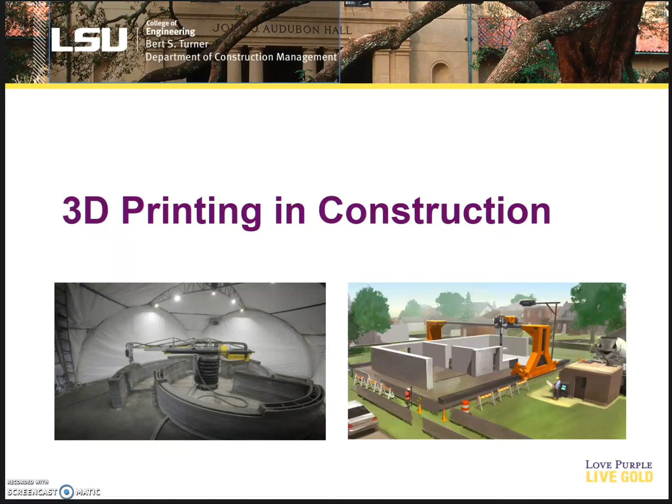3D printing as a technology has been around since the 1980s. It's found plenty of use within manufacturing, specifically for prototyping. And more recently, it's been finding uses in other industries such as medical, or in this case, construction. Contour Crafting Inc. is the first American company to adapt it to a construction scale. According to their estimates, 3D printing can reduce costs up to 80% of conventional building.

This is through shorter project lengths and more efficient uses of materials. Due to being an additive manufacturing process, there's less excess, and there will be virtually no labor costs whatsoever. This will also increase safety within the industry as a whole. The construction industry has an exceptionally high accident rate, so this would make litigation costs for any sort of thing like that just much more affordable.

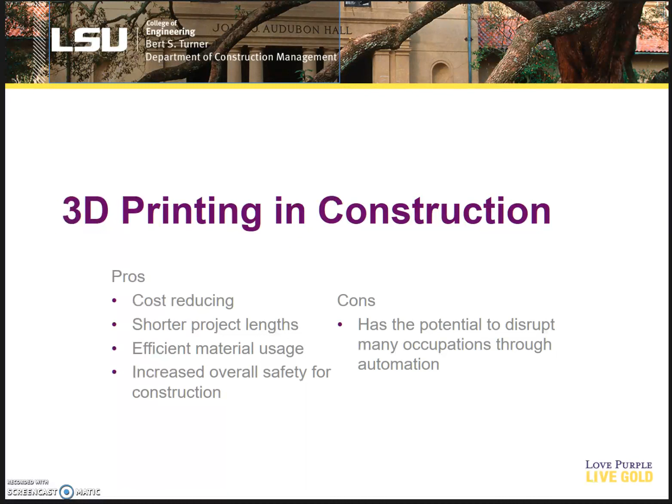But like I said, as it is automation, it will replace jobs if it's ever adapted on a mainstream level. This is due to everything being taken care of by a machine. Currently, there's plenty of limitations keeping it from being a mainstream technology, mostly because it's still in its infancy. There's only a few companies that have developed a construction scale printer, and because it's intellectual property and there's patents involved, they are not very keen on sharing their research. So there's not a lot of accessible research currently available.

Then there's the logistical problems. For conventional projects, you only have to have your materials as needed, over the course of weeks, months, whatever. But for 3D printing, if you're printing something in a day or two, you need all of your materials all at once. So this creates a lot of stress on supply chains, and then there's the issue of actually moving the printer around. Even on smaller projects, these printers are going to weigh a couple tons. That's not easy to move around, especially if it's a giant crane system or an arm system like the Apis Cor printer.

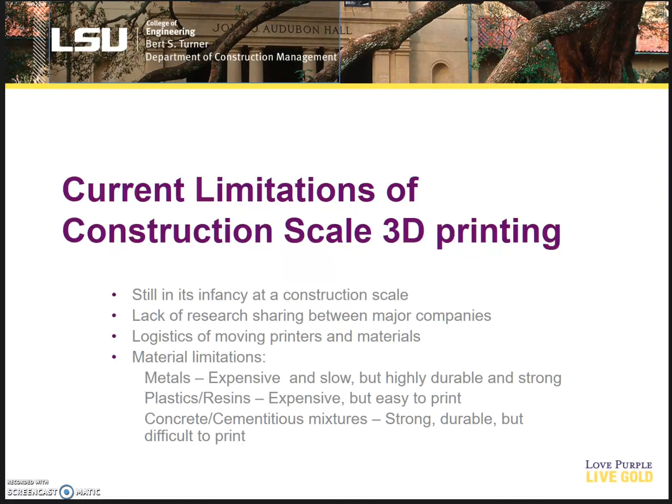So, 3D printed concrete has a plastic-like consistency versus conventional concrete, which is meant to fill in forms or be laid into a slab. This will pretty much stay however it's extruded. It uses small aggregate sizes, a nominal size less than 3 millimeters, and it utilizes admixtures to improve the extrudability of the mix, and admixtures that promote mixture cohesion to further improve the initial stability of the concrete.

So, for 3D printed concrete, one of the main issues currently affecting it is the printability window. This is its initial stability, as I mentioned before, and its printability limit. Now, the initial stability is each layer's ability to retain its shape without deformation from its own weight or from subsequent layers. The initial yield stress usually increases over time in a linear fashion up to its set point.

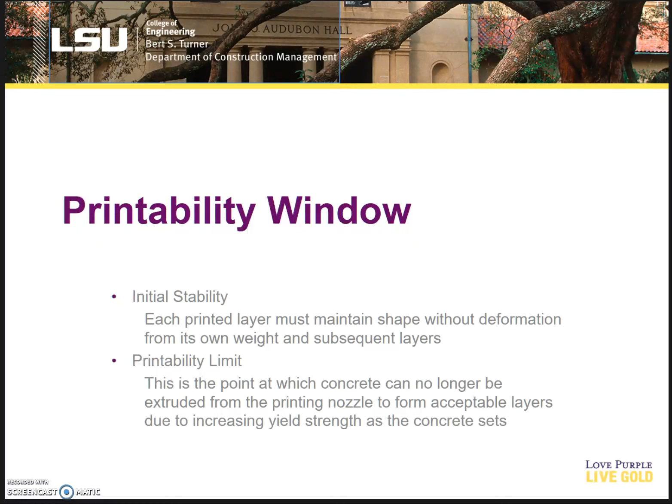And the same reason that it starts to gain strength is the same reason there's a printability limit. This is the point at which concrete can no longer be extruded from the printing nozzle to form acceptable layers. If you leave the concrete in the printer too long, it'll set and probably ruin your printer, or at least the nozzle, because you have to get everything out. Now, printable concrete... So, cold temperatures affect this printability window substantially.

Conventional concrete practices avoid cold due to decreasing the amount of workability and also slowing the initial set of the concrete. This is usually pretty bad. You kind of need concrete to actually fill into forms to create shapes. But when we're talking about 3D printed concrete, this is actually somewhat advantageous as it increases the initial yield stress of the concrete, and workability can be altered with admixtures.

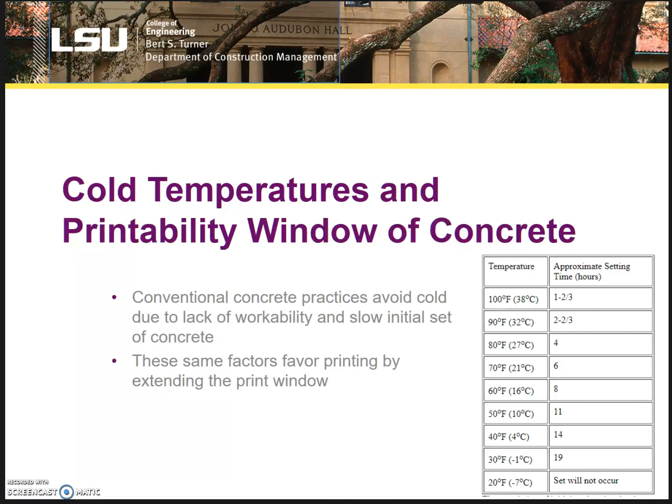And because it has a longer set point, the print window is extended as the set time goes from around 4 to 5 hours to around 20 at very low temperatures. So, the research objective for this is to create a printable concrete mix that functions at low temperatures and to gain better understanding of this print window in cold environments. Quantitative analysis of cold printed concrete is needed to establish if this is a valid option to extend the print window in colder climates.

For this experiment, our concrete mixture design, we'll have to further tweak it to get it just right, but it's going to use a type 2 Portland cement, nominal aggregate size of less than 3 millimeters. It'll utilize a high-range water reducer and viscosity modifying admixture to get the right consistency so it can be extruded.

Our cement and water ratio will have to be identical for each of our mixtures, which we're going to have 4 of total. And our 4 concretes we will be testing will be, as a control, 1 without any of these admixtures, 1 with silica fume, 1 with nanoclay, and 1 with polypropylene fibers. Each of these help increase cohesion for the mixture and increase compressive strength for the concrete.

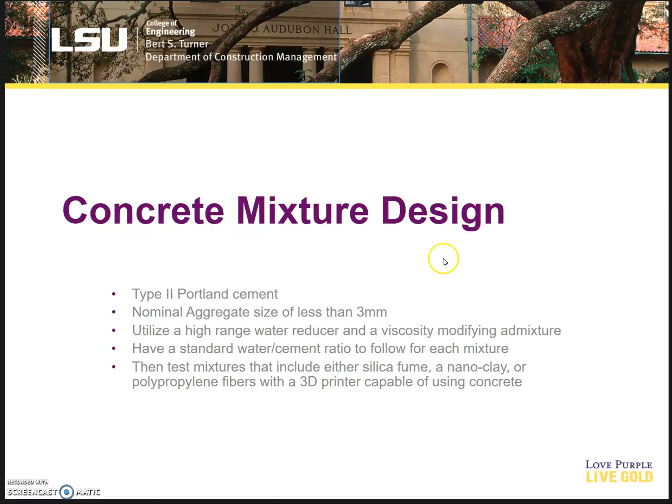How we'll test this will be through the stability test. The stability test will be used to measure everything. This is before and after pictures, essentially. We'll be using a ruler as a benchmark. What you do is you print out an initial layer, and the second layer will be placed based on one of our time gaps, which will be at 0 minutes, so immediately, after 15 minutes, and then 30 minutes. And this will help establish our initial stability for each layer.

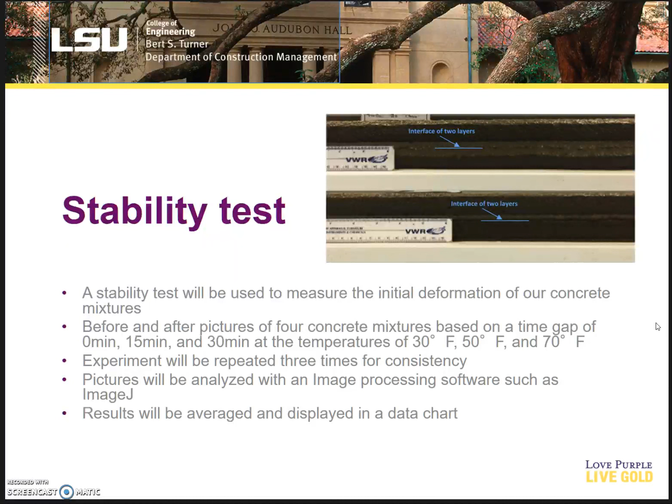And we'll be doing this at 30 degrees, 50 degrees, and 70 degrees, or 70 degree temperature will be our control group. And we'll repeat this experiment 3 times total. So we'll take a picture of these. We'll have a ruler just in front, like there. And we'll take a picture and analyze that with image processing software such as ImageJ. From there, we can average all of our results and display them in a data chart based on our 3 variables: temperature, time, and concrete admixture.

So, testing printability. Sorry I jumped around there a little bit.

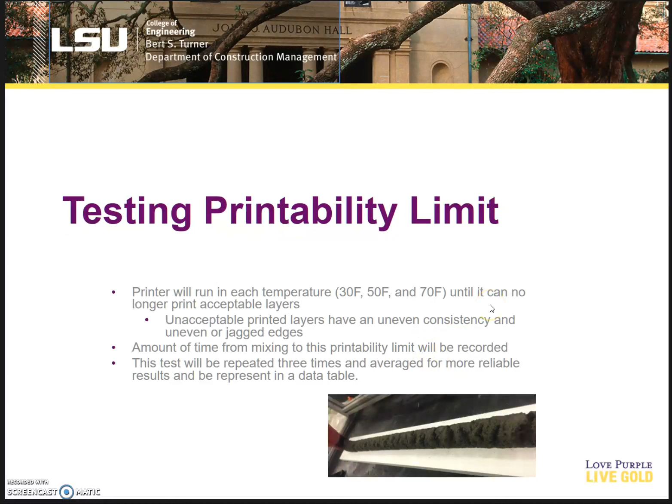Next we'll be testing the printability limit. This is pretty easy to test. You really just have to run the printer until it can no longer print acceptable layers. It'll end up forming inconsistent layers such as this one right here. So it'll have kind of jagged edges. It won't be uniform in any sense. And we can just record when it hits this limit at each temperature for each admixture. And we'll record this 3 times for more consistency, and we'll show this in a data chart.

So from here, we'll have both our initial set and our print limit. So we will then be able to show our total printability window, which will be the total time at each temperature for each cement mixture. This will show the total average data for each concrete mixture at the established time intervals and for each temperature. And we can see the total print window and conclude whether or not cold weather has indeed lengthened the print window.

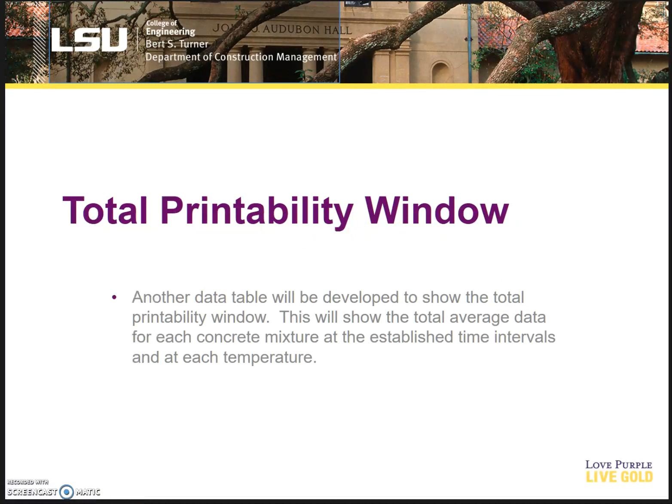So, preliminary results. Cold printed concrete can expand the period in which a batch of concrete can be printed, especially in cold temperatures. This is due to cold weather increasing the initial yield stress of concrete to promote more layer stability and lengthen the amount of time required for the concrete to set.

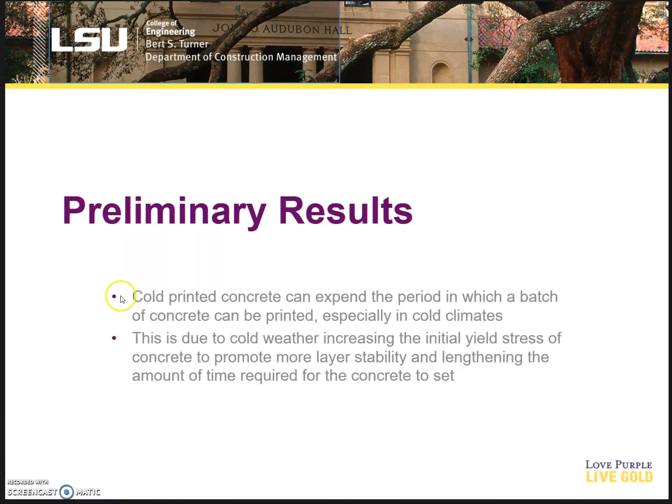As a whole, the study, there's not really a lot of information regarding extreme environments with 3D printing that's readily available to academics. So hopefully this study will fill in some of this research gap. With more research, construction scale 3D printing has the potential to make the industry more time and cost efficient, and hopefully make things better for the rest of us.